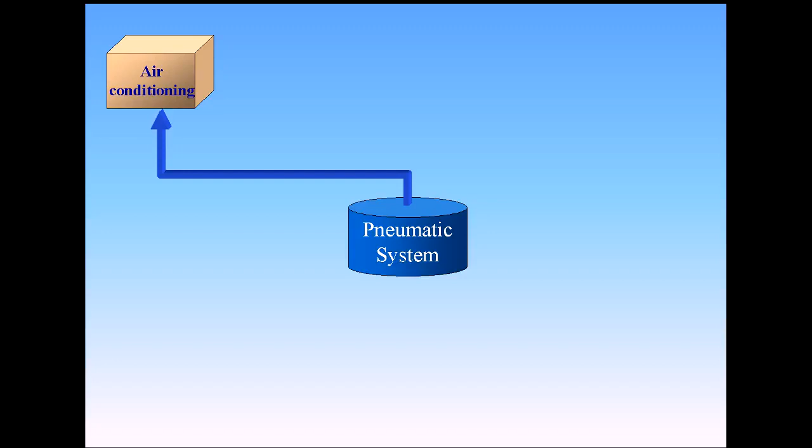The A320 pneumatic system supplies high-pressure air for air conditioning, wing anti-icing, water pressurization, hydraulic reservoir pressurization, and engine starting.

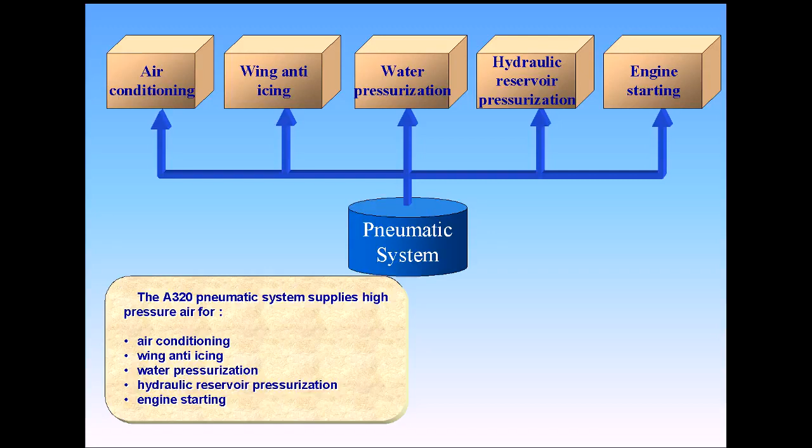High-pressure air can be supplied from three sources: the engine bleed system, the APU, and an external high-pressure ground power unit.

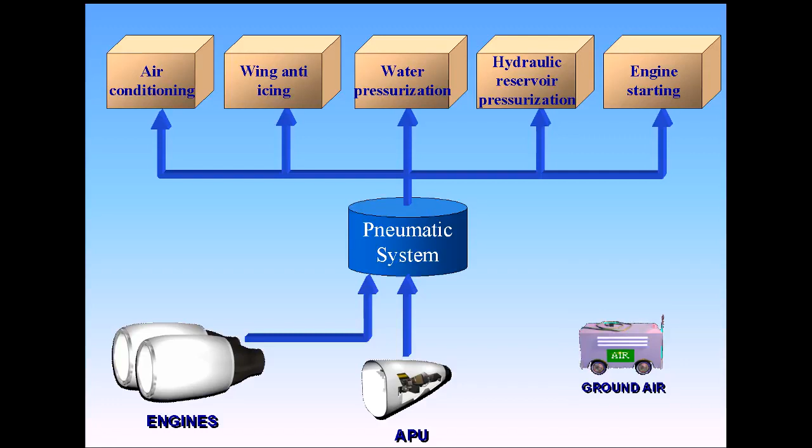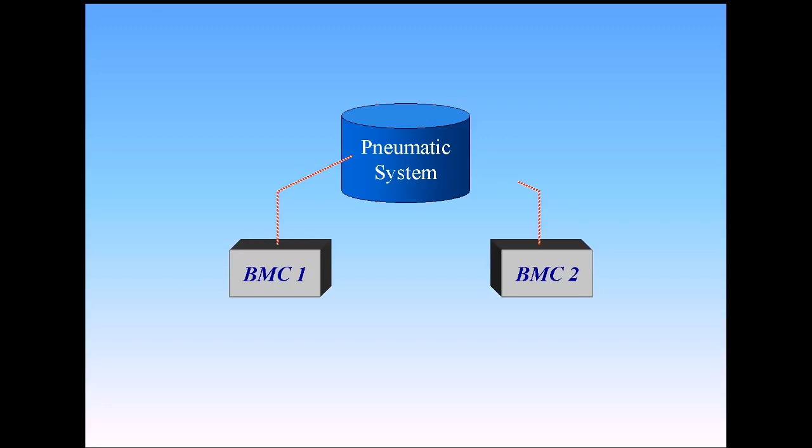The pneumatic system is controlled and monitored by two bleed monitoring computers, BMCs, one for each engine bleed system. Both are interconnected, and if one fails, the other takes over most of its functions.

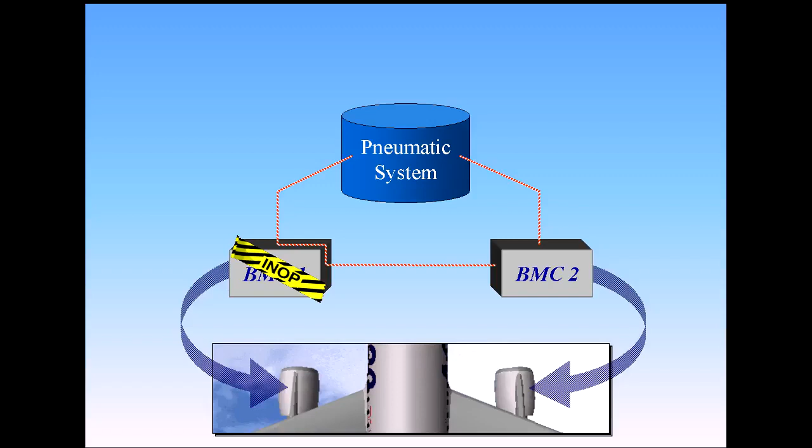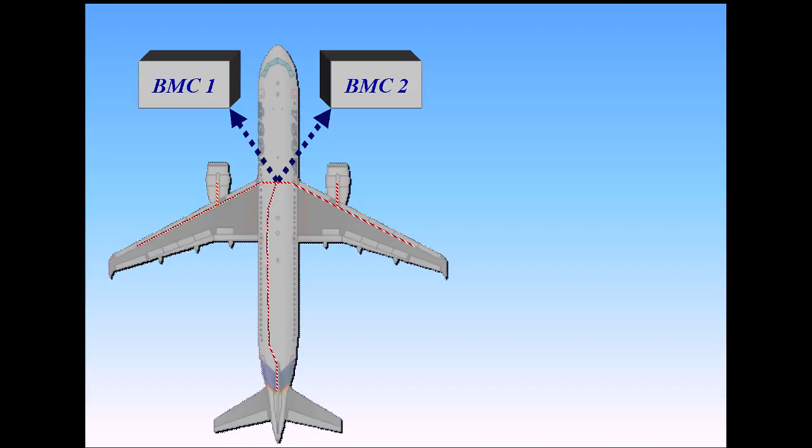Air leakage detection loops are installed near the hot air ducts in the fuselage, wings, and pylons. If a leak is detected, a signal is sent to the bleed monitoring computer, which automatically isolates the affected area. BMC 1 protects the left wing, number 1 engine, and the APU. BMC 2 protects the right wing and the number 2 engine. Should BMC 2 fail, BMC 1 takes over all its functions except the pylon. Should BMC 1 fail, BMC 2 protects all but the number 1 pylon and the APU.

Air is bled from two compressor stages of the engine: the intermediate pressure (IP) port and the high pressure (HP) port.

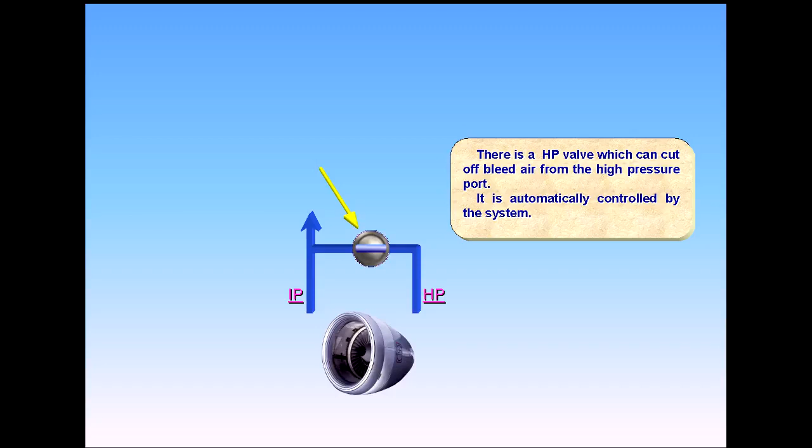A high-pressure valve can cut off bleed air from the high-pressure port, and it is automatically controlled by the system. The HP section is only used when there is insufficient pressure from the IP output, that is, when the engines are at idle. Once engine speed is high enough, the IP pressure is sufficient and the HP valve closes.

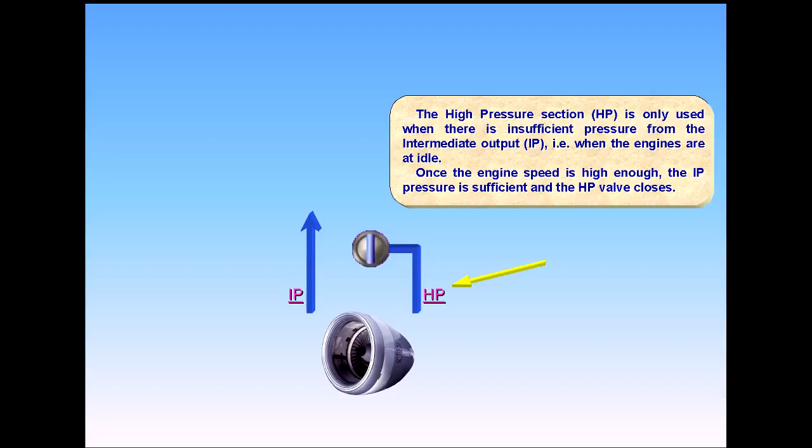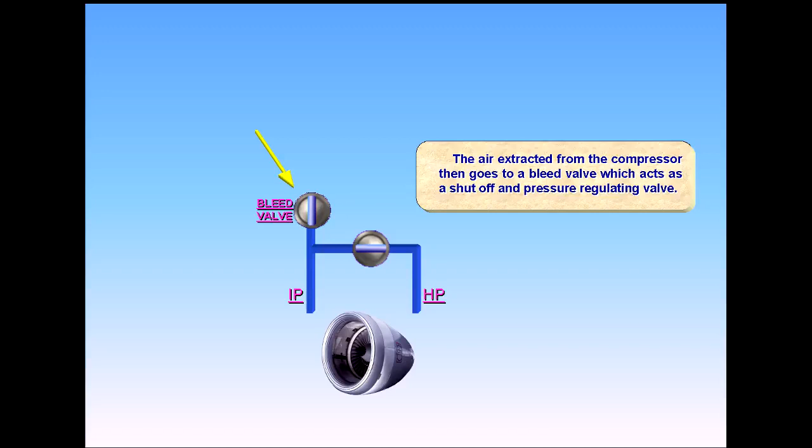The air extracted from the compressor then goes to a bleed valve, which acts as a shutoff and pressure regulating valve. Since the bleed air temperature is high, it passes through a pre-cooler before being distributed to users. The pre-cooler uses cool air from the engine fan to regulate the temperature.

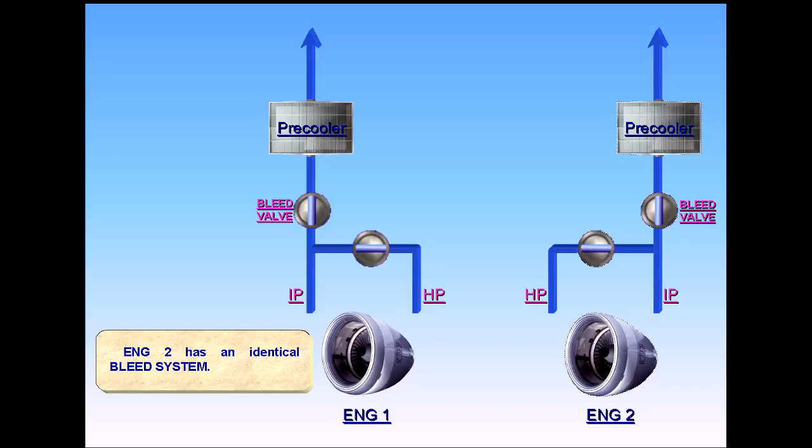Engine 2 has an identical bleed system. Both systems are connected by a cross-bleed duct, and a cross-bleed valve permits their interconnection or isolation.

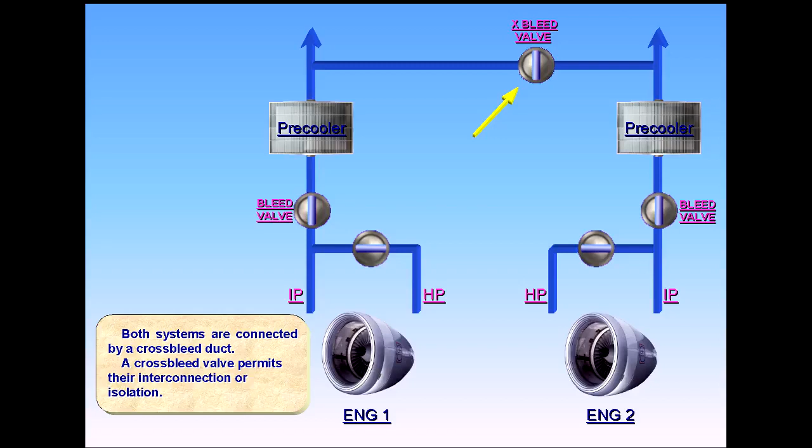The APU can also be used for bleed air supply. This is usually done on the ground for air conditioning and engine start, but APU bleed air is also available in flight. It is controlled by the APU bleed valve, which operates as a shutoff valve.

Should the APU not be available, a high-pressure ground power unit can be connected. This completes the pneumatic system.

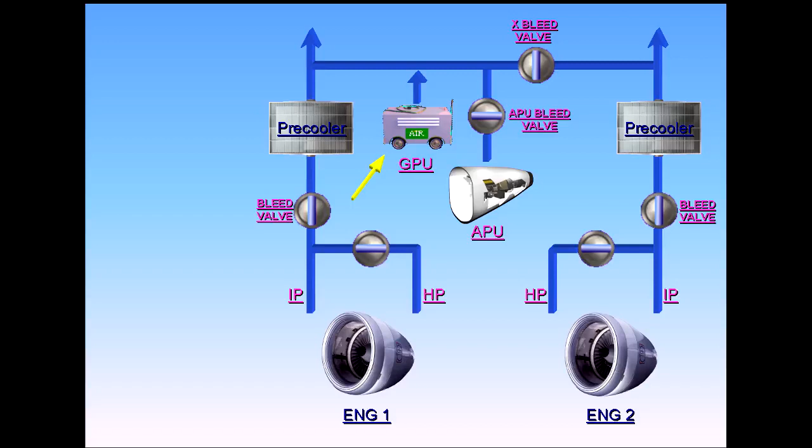We will now show you how system information is displayed to the pilots.

Information on the pneumatic system is displayed on the lower part of the ECAM bleed page. We have shaded the upper part of the page because it relates to the air conditioning chapter, which will be covered in a later module.

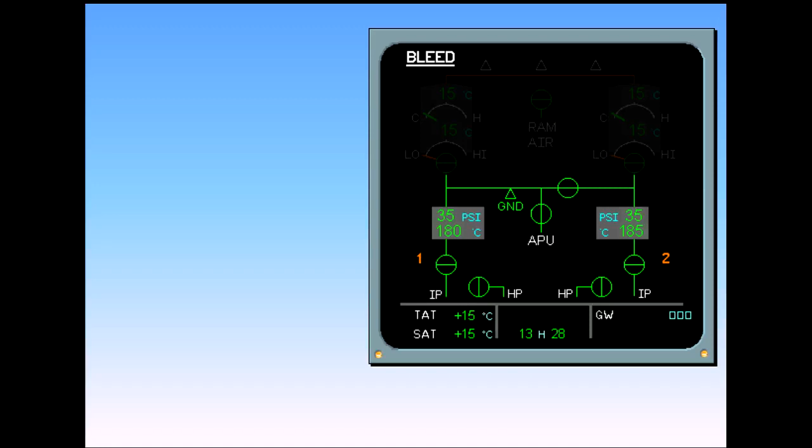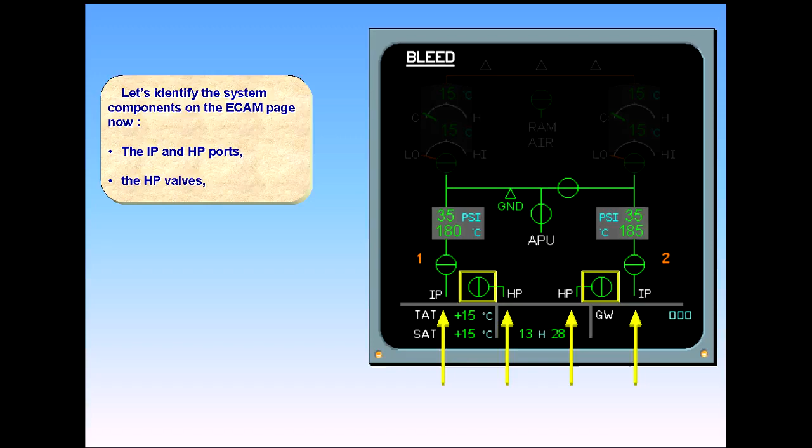Let's identify the system components on the ECAM page now: the intermediate pressure and high pressure ports, the high pressure valves, the engine bleed valves, the pre-coolers, the APU bleed valve, the cross-bleed valve, and the high-pressure ground connection. The following information is also displayed: bleed air pressure, bleed air temperature, and engine identification numbers.

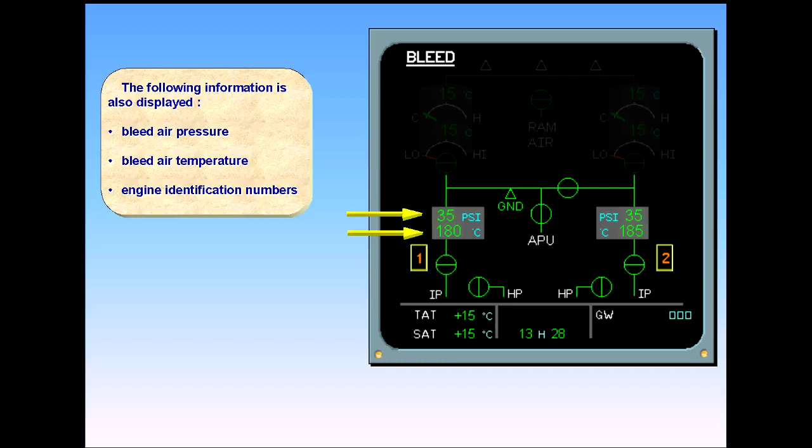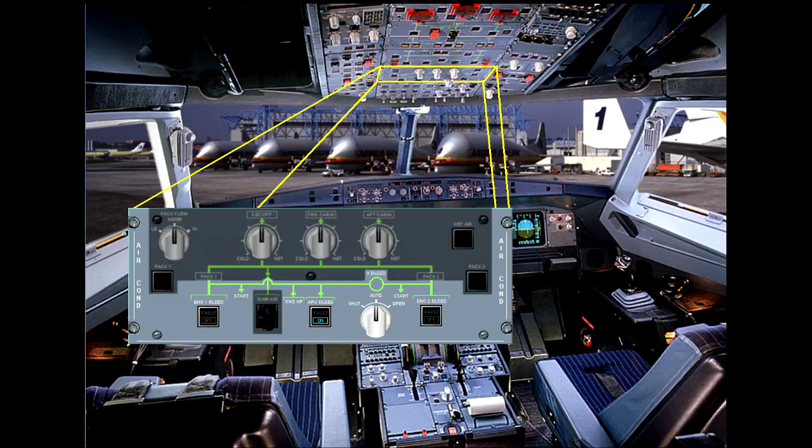Controls for the pneumatic system are part of the air conditioning panel located on the overhead panel. Again, we have shaded those controls which belong to the air conditioning chapter.

Each engine bleed valve is controlled by its associated push-button switch on the air conditioning panel. The APU bleed valve is controlled by its associated switch. The cross-bleed selector enables the pilot to open and close the cross-bleed valve manually, or to let the system operate it automatically.